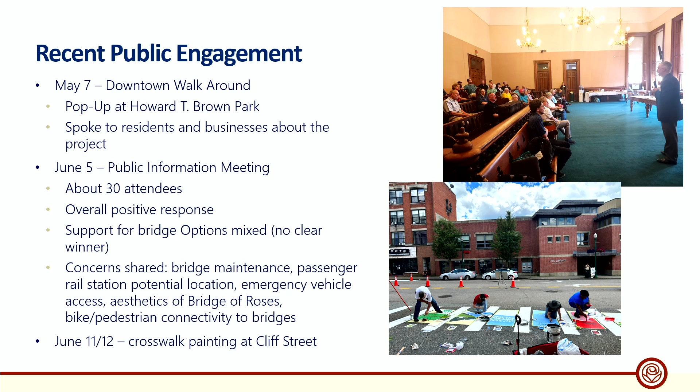At the Transportation Advisory Committee on the 10th, we talked about the June 5th public meeting and what had happened there. We got really deep into the different proposed improvements and the 3 bridge options, taking a couple hours to talk about them in detail and making some revisions. We went through things step by step, and the TAC really preferred option 3 for what would happen to the bridges.

Option 3 is having both bridges two-way. Some of the reasons for this, which I'll get into in a moment, talk about maintenance, the mobility of getting people around, and also access, especially to the transportation center and the marina. But I do want to stress that doesn't mean the other two options we've talked about before can't still be considered. We see this as more of a jumping off point to where the other two options could be tested or tried out later, once more of the other changes are made as well.

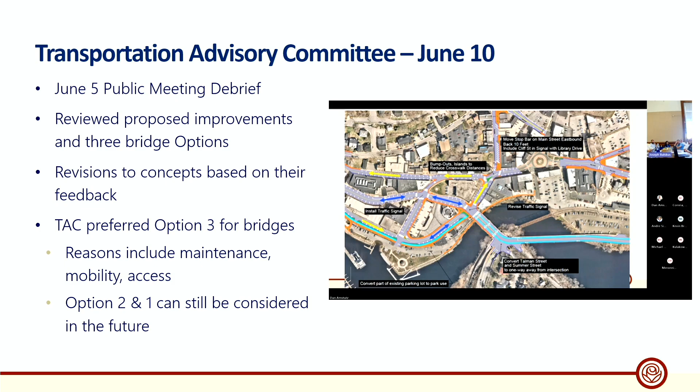So I'll get further into that, but getting straight into the recommended transportation improvements. As I said, the recommendation for the bridge part is option 3, to convert both bridges to two-way. The rest of what you see here, and we'll zoom in on each part of the map, sort of east of Washington Square, is more or less the same or very similar to what we presented a couple months ago at the public information meeting.

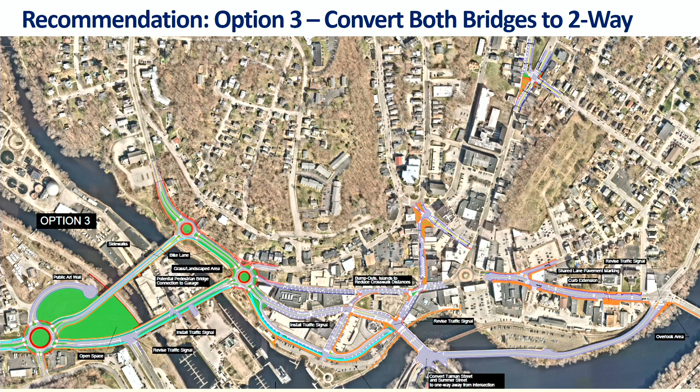As we go over to the east side of downtown, you can see the Franklin Square roundabout on the left side, and on the east, on the right side, is Main Street at Viaduct Road. A lot of the same things we had suggested still hold true that we're recommending now.

The curb extensions on Main Street are important to help people cross the street. We've heard a lot of concerns about crossing at the post office, and to help shorten those crossings and slow people down as they're driving down Main Street, we'll also be looking at revising the traffic signal at the intersection of Main Street and Viaduct Road.

Up on the left side where you see it says narrow intersection of Cliff Street and Market Street or Main Street, that's where the crosswalk painting was actually done. We're trying to narrow that down by putting in a little splitter island and making it safer for people to cross, as it's a long crossing right now with not a lot of friction to stop people coming down Cliff Street and making that right turn.

One of the things I want to point out is that when we talked to the advisory committee, they had some concerns about having bicycle lanes on Viaduct Road. Although Viaduct Road and the bridge are wide enough to have bicycle lanes, they were concerned this wouldn't be a very attractive bike route, and if somebody was in a crash with a vehicle, they wouldn't really have anywhere to go or any way to get out of danger.

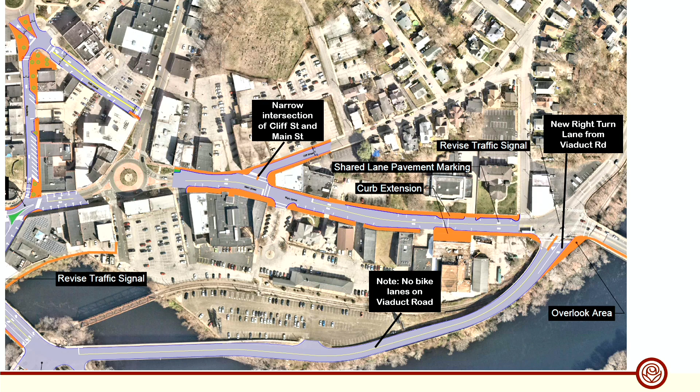I'm going to focus more on the right side here, showing the right turn lane from Viaduct Road onto Main Street. We'd identified this as an area of persistent congestion that would likely get worse in the future, as people are coming down Viaduct and turning onto Main Street to continue east on Route 2, and also coming from the west and turning onto Viaduct. So our recommendation is to incorporate a right turn lane so people can move along and reduce some of that congestion off of Viaduct.

Part of this is to include a sort of pedestrian overlook. You can see the orange space on the right side could be an overlook of the river. It would require widening the bridge over the railroad, so it would be a significant project, but this was one of the most feasible options we could see for helping to reduce congestion at the intersection.

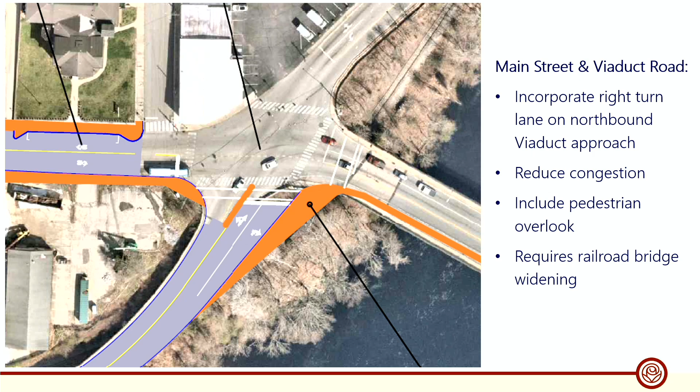Now, when we talked to the Transportation Advisory Committee, they asked us, did you look at a roundabout here, as we've looked at roundabouts at other parts of downtown? We didn't initially look at it because of the impacts - in order to really do this, you'd either have to impact the bridge on the lower right side or impact the building on the upper left side. So we've used a standard diameter 120-foot circle to look at this at a very high level to see if a roundabout would fit, and that 120 feet is a standard single lane roundabout.

As you can see here, that blue circle goes right into that building on the upper left, which is 364 Main Street, I believe.

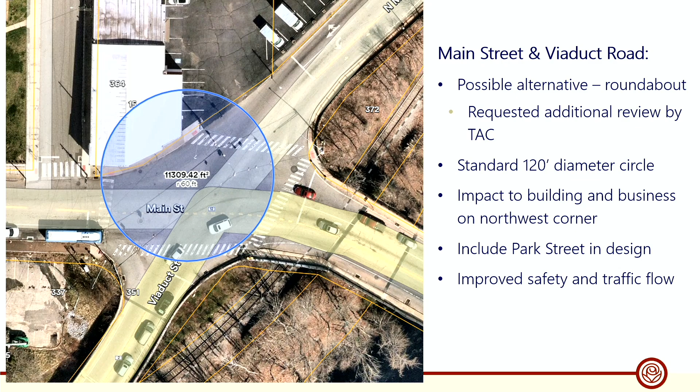So that would have a significant impact if that was done. You would also want to include Park Street within this, making it more of a five-leg intersection, since Park comes in on the left side and isn't actually part of the existing signal. Incorporating that would be part of the design. We did look at it a little bit, and it would improve safety and traffic flow, but we'd put this as more of an alternate potential suggestion, not currently our recommendation.

Continuing on as we move further west, right outside here at City Hall, we showed this before: the changes to Broadway and to Bath Street. Bath Street becoming two-way, Broadway shrunken down to one lane with angled parking along the roadway to increase the number of parking spaces.

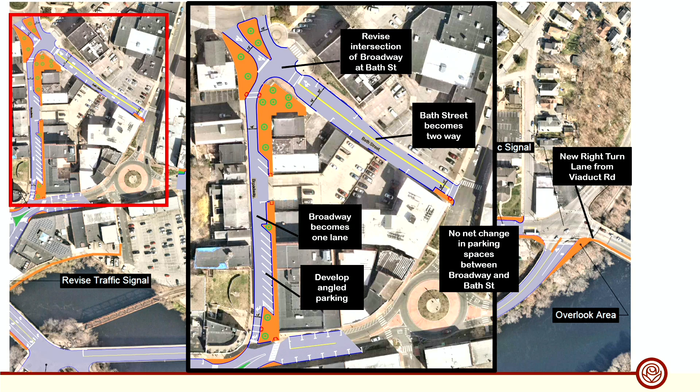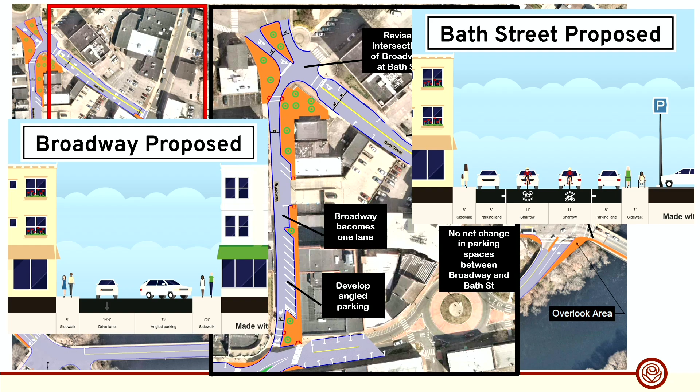We also included some street sections, sort of cartoony, to help you visualize these. So on Broadway, looking north, you can see the one lane on the left side and angled parking on the right. Changing Bath Street from one-way to two-way would be a fairly simple exercise since it's already wide enough to be a two-way street as is.

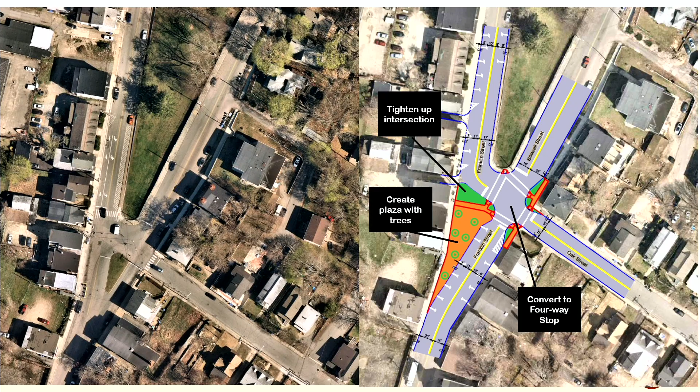One comment from the advisory committee was about the area next to the parking, to make sure people wouldn't be cutting across the grass while going to the parking. So we'd look at turning that into a pedestrian plaza type area with tree pits and trees to really beautify the area. That was something that changed between the public information meeting and today.

Moving along to the west, as we talked about, this wouldn't change very much from what we discussed before, but just to go over it again, these would be very significant changes.

Taking Water Street and making it two-way, and converting Chelsea Harbor Drive on the bottom side to really a local street - one-way on one side as you come in, then two-way so you can get to the businesses close to Water Street and back again. Cutting off the connection from Chelsea Harbor Drive to Water Street will improve the functioning of the signal and the operations by moving traffic so it doesn't have to make that right turn anymore coming along Route 2, but can continue straight along the flow.

Also looking at the intersection of Talman, Water, and Viaduct Road, as mentioned before, trying to eliminate a couple of the approaches. It currently has 6 different approaches, so it has to go through 6 different phases, but simplifying the operations there will really improve the functioning of that intersection.

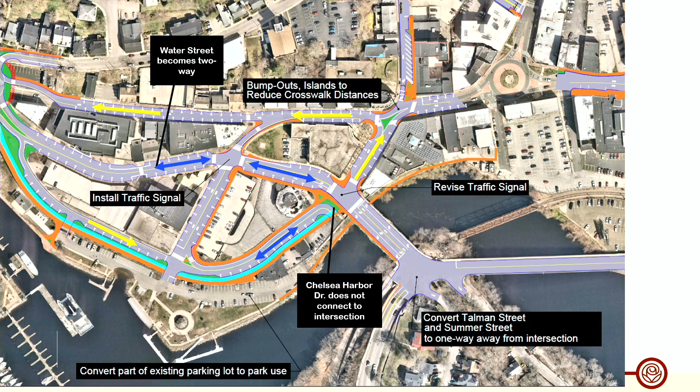Zooming in a little on the Chelsea Harbor Drive section, to help people as they're coming out of the park and this area get back onto Water Street and Route 2, we recommend a traffic signal at Market Street and Water Street. We did talk to a few businesses.

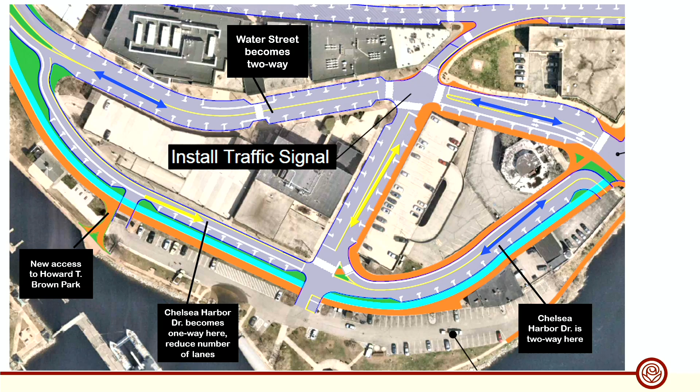They were in support of this, as they were concerned about people speeding down Water Street and being able to actually get out onto the street was difficult from Market Street, and also for pedestrians to be able to cross this intersection, which is challenging for them.

Again, showing some of the ways it could look, in a sort of a vision. Water Street looks much the same if you just convert it to two-way. You have enough width in order to do that.

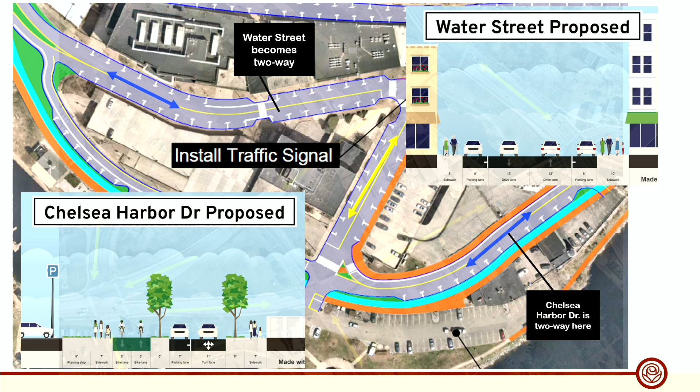Chelsea Harbor Drive has essentially 3 lanes, or almost 4 if you count the parking lane. If you removed a couple of those, you could include a protected or separated bike lane, also trees or other vegetation to beautify the area, making it feel more part of the park as opposed to a speedway people just run through without seeing anything. We thought that was helpful to visualize, and we can include that within the plan itself.

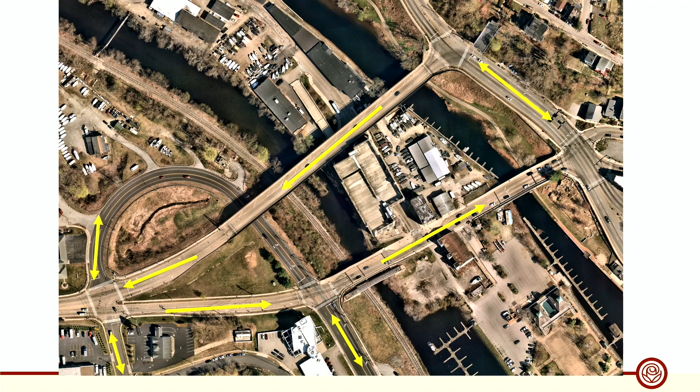Moving on to the west side of downtown, which has the two bridges we've talked about before, we do recommend option 3, which keeps both bridges open to traffic but makes them two-way so it's easier for people to get around. It also has roundabouts not only at Washington Square, West Main Street, and North Thames Street, but also at Washington Street and West Side Boulevard. These 3 roundabouts will improve safety.

The Washington Square roundabout doesn't need to be quite as large as in the other options, because when people are coming eastbound toward downtown and want to continue east toward Route 2, they could go down West Main Street. If they're going west and want to go north toward the expressway part of Route 2, they could take West Side Boulevard. So they have more options to get around, and the traffic splits in two different directions, needing fewer lanes on each road, as opposed to forcing people to take one bridge or the other.

This also allows you to put in bicycle lanes for bike mobility on both West Side Boulevard and West Main Street. It's important to connect to the bike lanes that would be on West Main Street further to the west, using a shared use path through the roundabout and continuing east or the other way around.

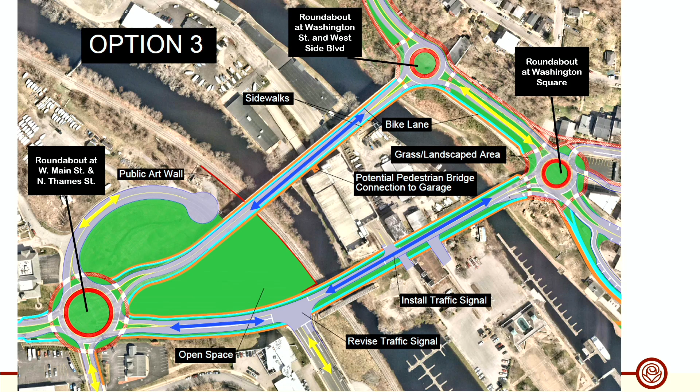Again, providing some looks at what that could look like, you do have the space there in order to have your pedestrian facilities, your bicycle facilities, and the driving lanes as well.

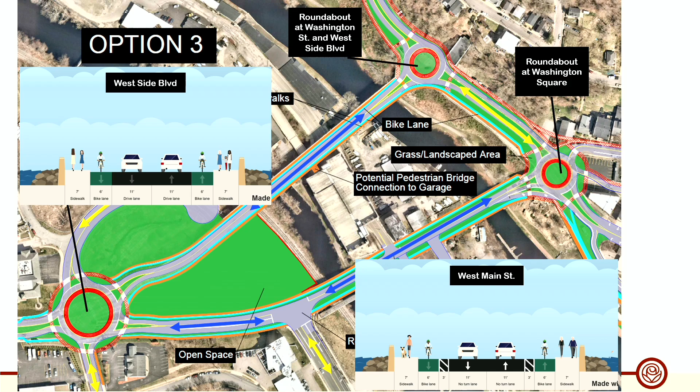As I foreshadowed earlier, option 3 we see as really a starting point for continuing to work on, potentially moving toward option 2 or option 1. It really doesn't preclude either of them. It does provide safety benefits for all users with roundabouts, bicycle lanes, and wider sidewalks, so it improves bicycle and pedestrian mobility.

That was one of the things that came up when we talked to the advisory committee and through public comments: if you have option 1, everybody gets a really great facility on West Side Boulevard for walking and biking, but because you're pushing all the traffic onto West Main Street, you don't really have space for bike lanes. You may have to compromise some pedestrian facilities to fit in all the lanes needed to move that traffic.

And also to keep access for the marina and the transportation center. So by splitting this traffic, you're actually able to get more pedestrian and bike facilities on both of these roadways.

Access to the marina and the transportation center was also very important as part of the consideration. We heard a lot about concerns for the transportation center as well as for the marina, that option 2, for example, by making that a kind of endpoint to the marina, might cut off access that they want and need.

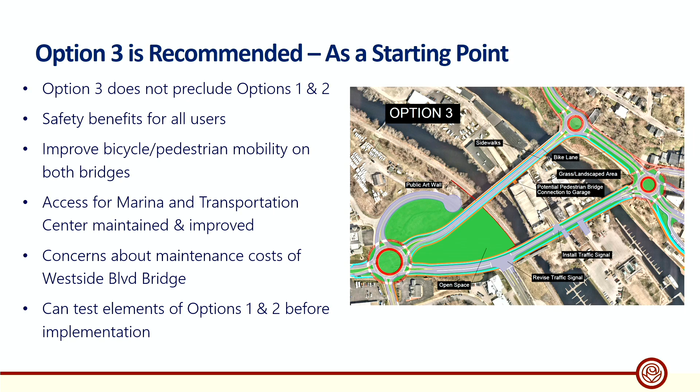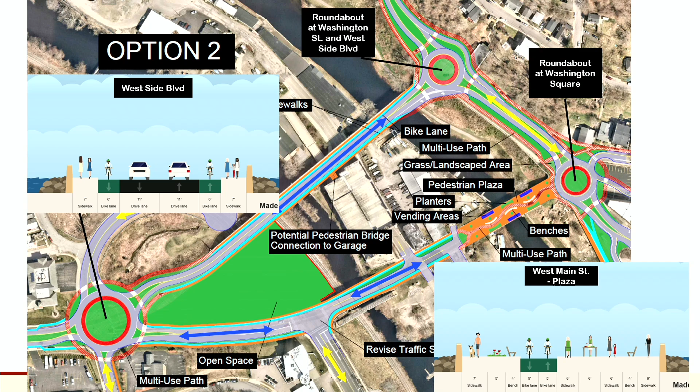So just the last couple of slides, to remind you about option 2—they're in the packets as well. Option 2 has the plaza with a multi-use path near the marina, which you can see on the right side of the screen. This is something that could be worked toward. We understand it better connects the transportation center more directly to downtown and to Howard T. Brown Park. This is certainly another option, and you could still put bicycle lanes on West Side Boulevard in this option. On the lower right side is an example of what that plaza multi-use path area could look like, with street vendors, benches, and other features to make it more pedestrian-friendly.

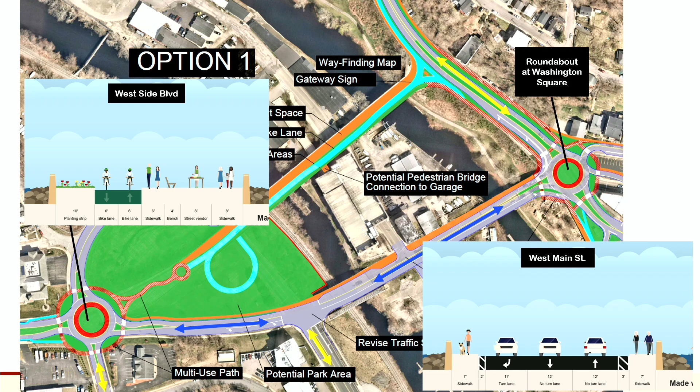And then for option 1 with the Bridge of Roses—again, it wouldn't necessarily preclude you from going in this direction, having all the traffic come on West Main Street, so that you could have the Bridge of Roses on the West Side Boulevard Bridge. Just some ideas of what that might look like if it were to move forward. You would still need the three traffic lanes on West Main Street in this situation, but you could have a bridge with a bike facility, a place for people to walk, some vegetation, and also some street vendor type areas, which we rendered in this picture as well.

So I'll just mention, we do expect to complete the documentation on this final recommended option, developing the final plan, and having the draft and final study report ready in the fall, so the city can move forward with its next steps. Thank you very much, and happy to take any questions or discussion.

Yes, thank you. Brought forth. There we go.

I'm interested in option 3, personally. I always thought that was the most useful, considering the needs of business and access and stuff like that. I'm very interested in the concept over by the end of the viaduct, where you're expanding that right-hand structure to allow for a right turn lane. I think that's a creative use of that area. You may not know this, but if you go across the street, there used to be a large building that the rail line ran under, which now just looks like part of the embankment with the rail disappearing under the bridge, but there previously was a structure on the other side. So use of that, I think, is very creative.

We didn't talk about this, and I'm going to ask one question, then turn it over to members. We have talked for a long time about redesignating Route 2, taking it out of downtown Norwich—whether we call it scenic Route 2 or not, I don't know—but we know there are thousands of cars that travel through downtown with no intent of stopping here. They're not patronizing our businesses, our restaurants; they're just passing through for a different destination. I don't know if you even looked at that, and that's really the question—or if you have any information that could help lend to that discussion, because I think for this to be really successful, we need to include that discussion.